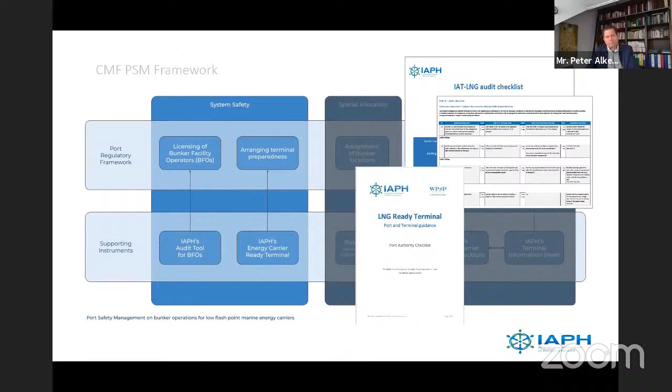Also, on an operational level, we ensure harmonization of operational safety of all the bunker process involved parties. On this level, we provide the bunker checklists, which have already been in use since 2013 for LNG, truck to ship, ship to ship, and station to ship. Terminals are also involved on an operational level, and CMF provides the terminal information sheet, which is part of the bunker checklists. And then we come to spatial allocation.

And this is quite important. Often based on national legislation, a port authority may have to decide at which locations bunker operations in a port area are permitted, taking into account, among other things, the spatial planning of the port, risk analysis for external safety and nautical safety. For CMF, it's rather hard to develop generic support for this safety level.

We are, however, aiming to provide guidance in the port guidance tool we work on. For some ports, it may become the hardest challenge for new fuels: where may the port allow bunker operation, looking at the risks for the surrounding area.

External safety is about risk to the surrounding area when handling hazardous substances, which most of the new fuels actually are. On this slide below, you see the LNG bunkering map for the Port of Amsterdam. It's based on external safety research. Based on quantitative risk analysis, we have assigned bunker locations in the port.

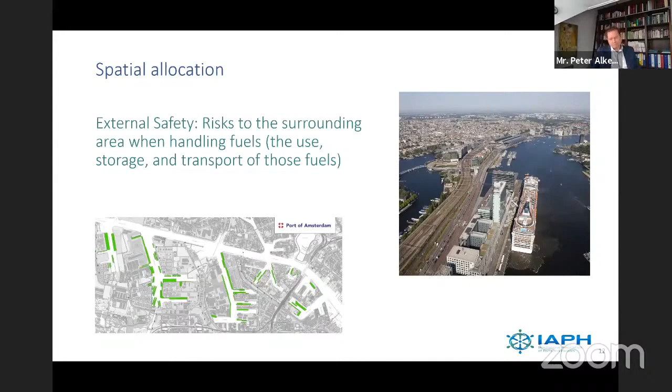On a system level, we're trying to make generic tools of all the tools we have for LNG. The audit tool has to become generic for all fuels, and also the LNG Ready Terminal tool. On an operational level, we've started working on checklists for new fuels, for instance a truck-to-ship cryogenic checklist for both LNG and hydrogen. Also for methanol, we're developing a flammable and/or toxic liquid checklist for truck-to-ship operations.

I'm sure the slides will be shared, so I won't go into detail on all the other tools. That brings me to my last slide.

The shift towards new marine fuels brings challenges for ports. High-level, high-quality safety management is required for the new fuels now under consideration, both on the vessel and port side. Ports are working hard to overcome these challenges, and the IAPH Working Group on Clean Marine Fuels continues to develop instruments that support improving existing bunker safety frameworks in ports. When it comes to the IMO strategy to reduce greenhouse gas emissions, cooperation in the industry is essential. I think it's fair to expect that IMO, as well as IAPH, have a role in stimulating cooperation for the implementation of high-quality bunker safety management.

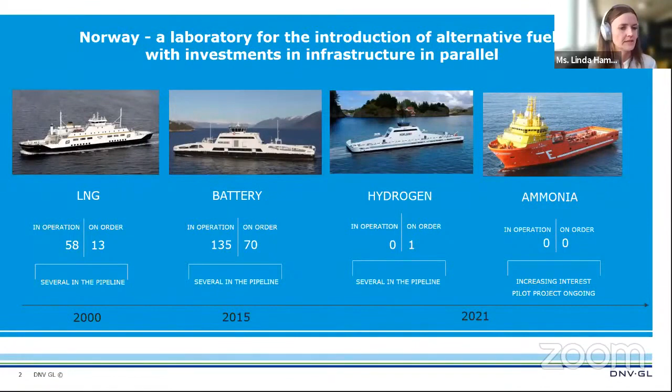In DNV's Maritime Forecast to 2050, we have mapped the key barriers for selected alternative fuels. There is no time to go into the details now, but the report is available online. One key barrier is safety and development of safety regulations. For shipping to succeed in using new fuels, it's a prerequisite that we know how to handle the safety.

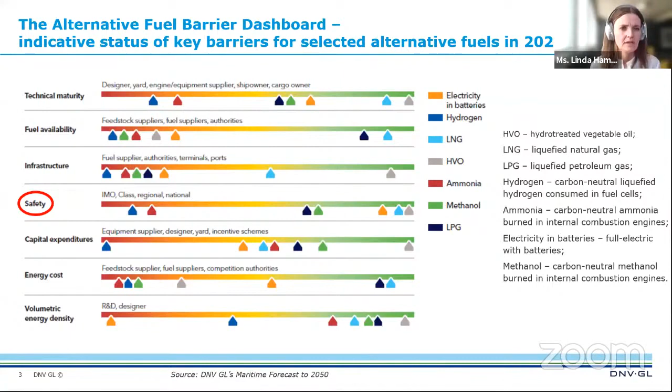So what are the safety challenges? Most non-conventional fuels are gases or low flash point liquids. They have properties posing different safety challenges from those of conventional fuel oils. The main challenges are fire and explosion. Some are toxic, some are stored at cryogenic temperatures, and there is a high energy content in gas tanks. This requires additional safety barriers to maintain the safety level when compared with conventional fuels.

And since the properties are specific for each fuel, there is a need for development of requirements for each fuel type.

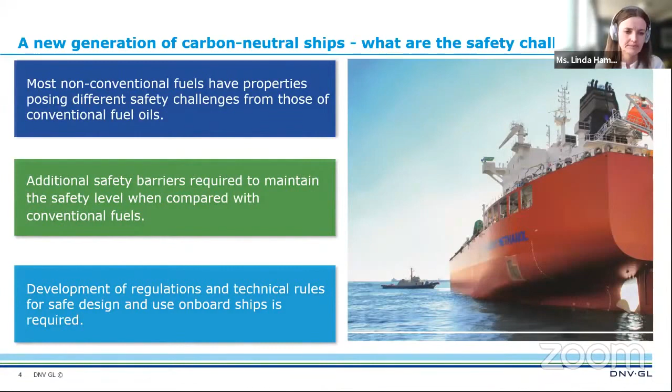It has been a strong focus in Norway to establish requirements for the safe use of alternative fuels, and by that, removing barriers to the uptake of alternative fuels, starting with national regulations and class rules for LNG 20 years ago, followed by class rules for fuel cells, batteries, methanol, and LPG.

On behalf of the Green Shipping Programme, a public-private partnership in Norway, DNV has recently completed development of an ammonia safety handbook with input from the Norwegian Maritime Authorities and other partners in an ammonia pilot project. The intention is to provide practical guidance on safety aspects in developing ammonia fuel ships. The first class rules on ammonia as fuel are planned to be published later this year.

There is also ongoing development work for hydrogen, and DNV is working with industry partners on removing barriers. We have initiated the MariSafe joint development project designed to advance maritime hydrogen-specific competence. This JDP aims to provide preliminary recommendations for the safe and effective introduction of hydrogen as a marine fuel in a safety handbook later this year.

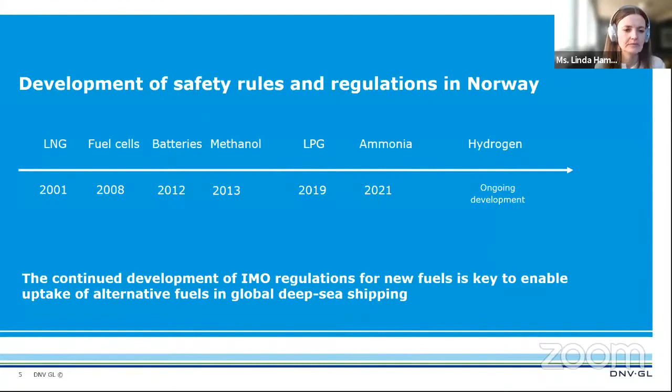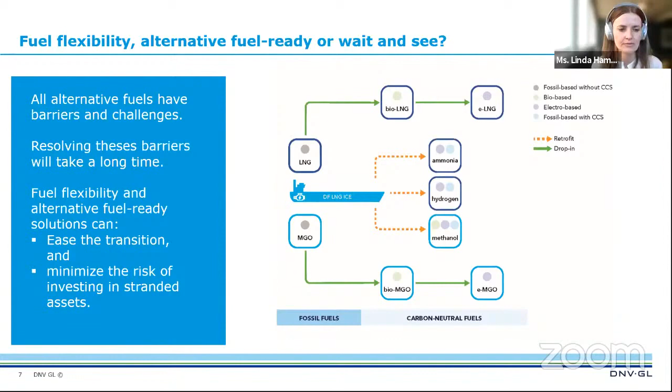In the development of zero-emission solutions for deep-sea shipping, we need pilots. There are, of course, different opportunities in short-sea shipping and deep-sea shipping, and not all technologies are yet applicable in deep-sea shipping. The experience in Norway is that the introduction of alternative fuels and new technologies in short-sea shipping is a good way of maturing technology for use in regional short sea shipping and later global deep sea shipping.

The continued development of IMO regulations for new fuels is key to enable uptake of alternative fuels in global deep sea shipping. Thank you for listening.

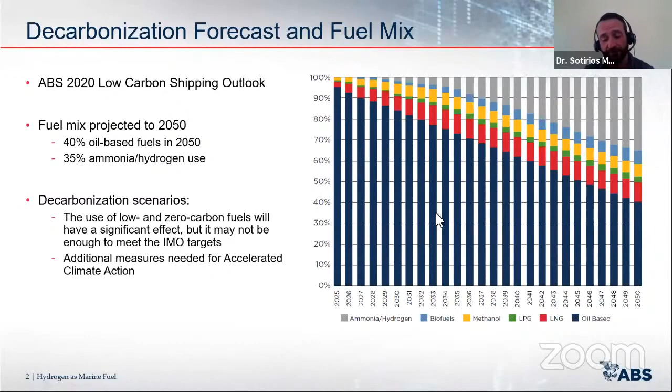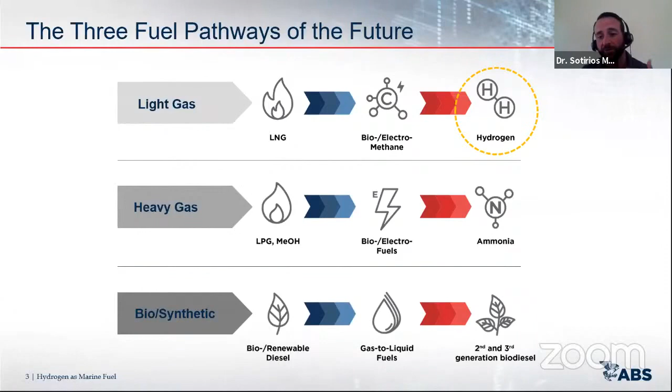That has to do with the fuel containment systems, the fuel gas supply systems, and of course the operational methods and techniques that you can apply to maximize the benefit of using a zero carbon fuel such as hydrogen. So really, hydrogen is at the end of our light gas pathway, and by the end we mean longer term — 2035, 2040, and on all the way to 2050.

Now, a few important, basic things about hydrogen. Based on the International Energy Agency numbers from 2019 global production, we know that about 75% of hydrogen is produced from natural gas, and about 23% is produced from coal. That immediately leads us to believe that the production itself is a carbon intensive process, which does not make hydrogen very, very green.

So we immediately know that in order to promote the green credentials of hydrogen as a fuel, we need to find other ways to produce it, using, for example, renewable energy, and of course using water as the source.

Hydrogen and ammonia are directly linked in the production pathways, because once we have hydrogen formed from whatever source, we can combine it with nitrogen to produce ammonia. So really, the production pathways being linked means they can be produced in the same facilities or in sister facilities, that can be either centrally located or distributed.

The challenge, as you may have heard, with hydrogen comes from its storage and transportation. It's kind of challenging to store it as a gas or a liquid, and I'll tell you about it in the next slide. But recently we've seen the advent of solid or liquid storage techniques, such as using liquid organic hydrogen carriers, for example. I'll tell you more about it in the following slide.

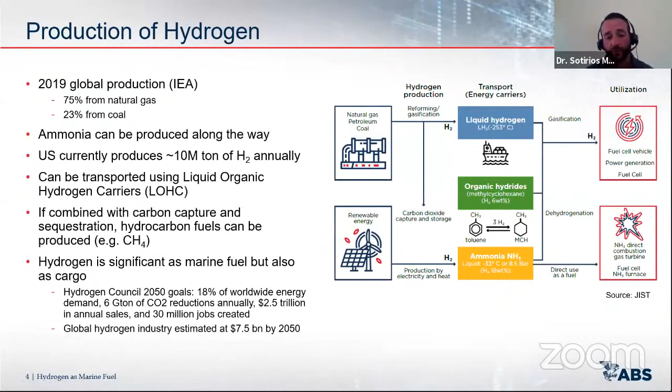That would correspond to about 6 gigatons of CO2 reductions annually, and $2.5 trillion of annual sales, resulting in about 30 million jobs created by that time. And the global hydrogen industry is estimated at $7.5 billion by 2050. So these are pretty significant numbers, and they point to the fact that we can have a significant hydrogen economy on a global scale by 2050.

Now, let's talk specifically about hydrogen storage, which will give you a better understanding of the challenges associated with this zero carbon fuel. So as we previously mentioned, hydrogen can be stored as a gas or a liquid. And of course, there are benefits and challenges to either option. It can be stored as a gas compressed at 350 to 700 bar, or as a liquid, cryogenically stored at minus 253 degrees C at atmospheric pressure. Or the other option would be to store it on or within solids.

And the importance of this really comes from the fact that there are applications that pose stringent requirements in terms of space. An example is automotive. The marine applications, not so much, but still we care about space and the tank volumes on board. But a lot of these solutions are currently in the research and development phase. And recently, in the last couple of weeks, I saw an article about a method of storing hydrogen in a gel type of structure that can be easily decomposed to extract the hydrogen on board, whether we're talking about a marine vessel or a car, for example.

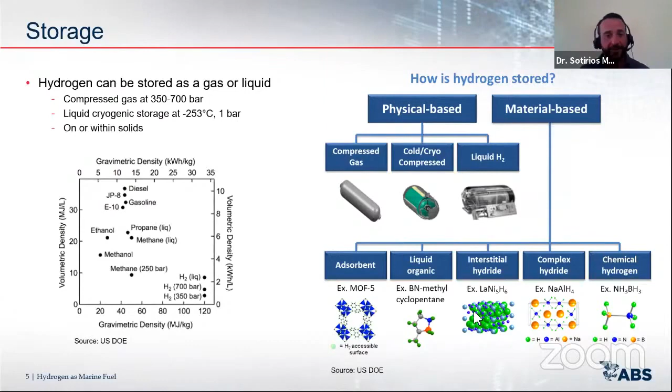But as we mentioned at the beginning of this presentation, this is a pretty carbon intensive production process. So that is one thing we need to really take care of, to make sure that we reduce the carbon intensity from the production as much as possible. With that said, in terms of IMO actions, there is a lot of discussion about accounting of life cycle emissions when we're talking about alternative fuels.

And this is a question, I would say, we get very often from customers. They would ask, if I use a biofuel or something else that has been produced renewably, can we get some benefit from that? And if so, how are these benefits quantified? What's the credit for us? So that's really something that we can point back to the IMO to discuss. So, life cycle emissions accounting.

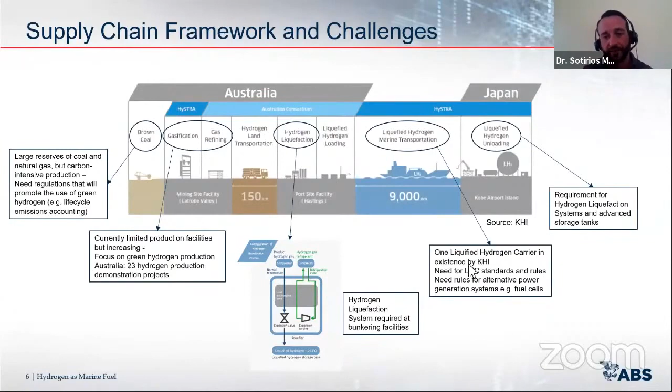Of course, the distribution is still an issue. We've seen examples of trucks carrying the hydrogen, because the properties of the fuel make it very challenging to build a pipeline infrastructure, and that points to more distributed or localized hydrogen production stations rather than central production stations and then pipeline delivery to multiple sites.

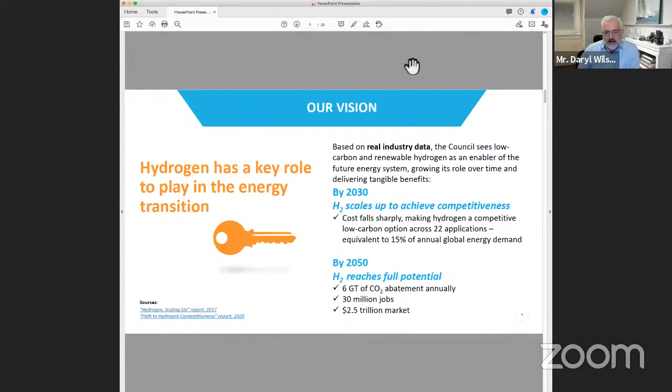And in our reports from the Hydrogen Council, we have shown that there will be a significant scale up in hydrogen use through 2030. And there are 22 applications representing 15% of global energy demand where hydrogen will serve on a competitive basis, and indeed a very large market by 2050.

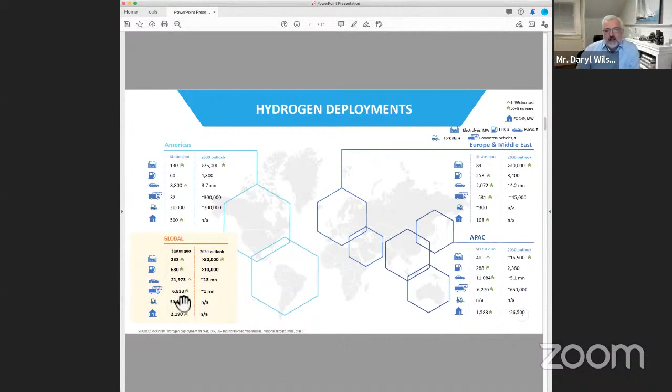Here we summarize some of the applications that are already under development around the various regions in the world. You can see that already we have 680 hydrogen fueling stations globally, more than 20,000 passenger car vehicles, more than 6,000 trucks. So perhaps more activity than you were aware already.

The total value of this investment is substantial. It now amounts to more than 350 billion in announcements. And out of that very large number, 38 billion have already passed investment decisions. So a lot of progress of late in hydrogen.

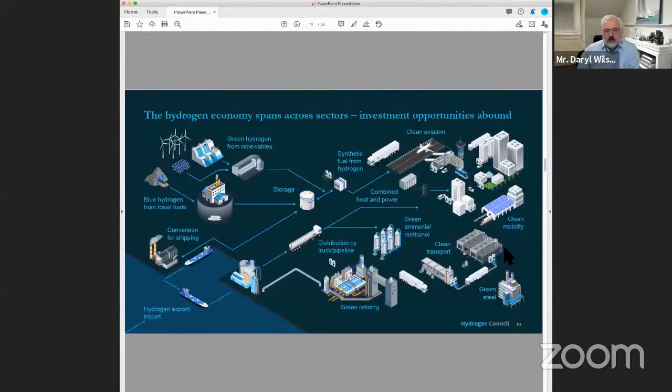One of the compelling aspects about hydrogen is it's able to serve as an energy vector across multiple sectors in society. In fact, we sometimes use the word sector coupling. And so you can see on this slide that hydrogen is involved in shipping. We'll come to that in a moment. In the migration of renewable energy as an energy carrier and a means of storage, integration into industry, in aviation, in transport. So many, many functions can be carried out with hydrogen as an energy vector.

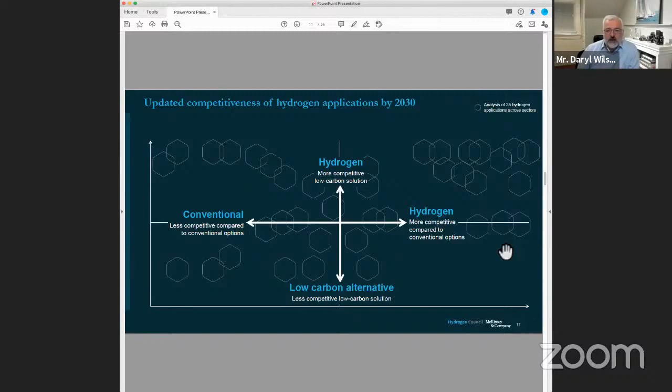To understand these diverse applications, the Hydrogen Council prepared a report, and this again will be updated very shortly coming next week with a spectrum of the applications, considering which ones are most competitive against incumbent solutions, conventional energy pathways, and then which ones where hydrogen is the most competitive green energy pathway. And so the attractive location on this matrix is in the top right-hand side.

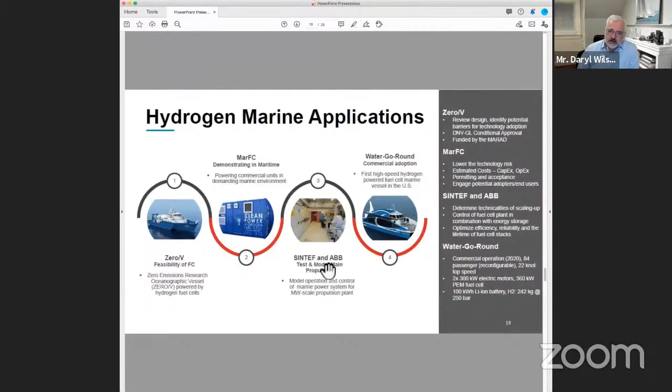The attractiveness here is that the hydrogen system can be fueled more or less on the same time frame as a diesel system. So you're putting a liquid or gaseous fuel on board, and that rapid refueling, yet being an electrified system, is one of the attractive points of hydrogen as a fuel. In Japan, another example with the NYK line working together with Kawasaki Heavy Industries and ENEOS Corporation.

Here, one of the key activities of the Hydrogen Council is to make clear the competitive and cost profile for hydrogen. Cost has been one of the impediments over time, and we have taken the role to start to show the roadmap for cost reduction to realize some of these applications.

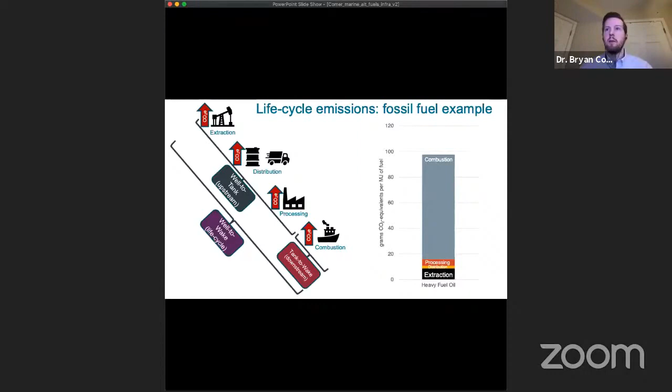Life cycle emissions from fossil fuels, like the example heavy fuel oil on the right, are generally dominated by combustion emissions, which you see in gray. However, upstream emissions, especially those from extraction and processing, can vary considerably.

Now let's consider a biofuel made from a food crop, in this case, soybeans. Instead of extracting crude oil from the ground, soybeans are grown and then converted into what's known as renewable diesel. It's called renewable diesel because the feedstock, the soybeans, is a renewable resource. But just because it's called renewable does not necessarily mean that it's sustainable.

If you look at the graph on the right, you'll notice that the combustion emissions in gray are offset by the carbon the soybeans sequestered while they were growing, shown as negative emissions in green. But there are emissions associated with cultivating, distributing, and processing the soybeans, shown in black, yellow, and red. You'll also notice the brown block at the top, labeled indirect land use change.

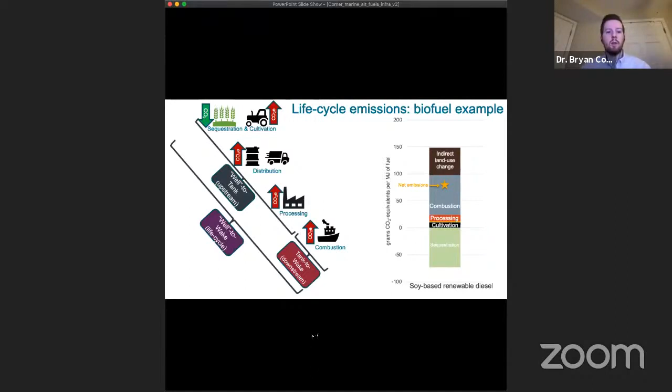Because soybeans are a food crop, the soybeans grown to make biodiesel displace those used for food. To continue to meet demand for soybeans, new land will be cultivated to grow soybeans for food. The emissions associated with indirect land use change can vary significantly depending on the crop and what the newly cultivated land was previously used for.

So as you can see, one must carefully consider the climate credentials of fuels to determine whether or not they are truly sustainable. To help, the ICCT has developed three principles for evaluating the sustainability of alternative marine fuels, and allow me to go over each one in a little more detail.

The first principle is to consider carbon dioxide equivalents, not just carbon dioxide. Why? Because some fuels are zero carbon, but not zero greenhouse gas. This is important to IMO because IMO's initial greenhouse gas strategy aims to reduce greenhouse gases by at least 50% from 2008 levels by 2050, and to phase them out completely as soon as possible this century.

The pitfall IMO must avoid relates to zero carbon marine fuels that nevertheless emit greenhouse gases. For example, burning ammonia emits no carbon dioxide, but it does emit nitrous oxide, N2O, a potent and long-lived greenhouse gas. For now, IMO regulations like the EEDI only regulate carbon dioxide.

Given that IMO's stated goal is to reduce and eliminate greenhouse gases, which are reported as carbon dioxide equivalents and not merely carbon dioxide, the IMO could regulate carbon dioxide equivalents in existing and future regulations, including the EEDI, which regulates the carbon intensity of new ships, and in regulations under development to regulate the carbon intensity of existing ships, including the EEXI and the carbon intensity indicator.

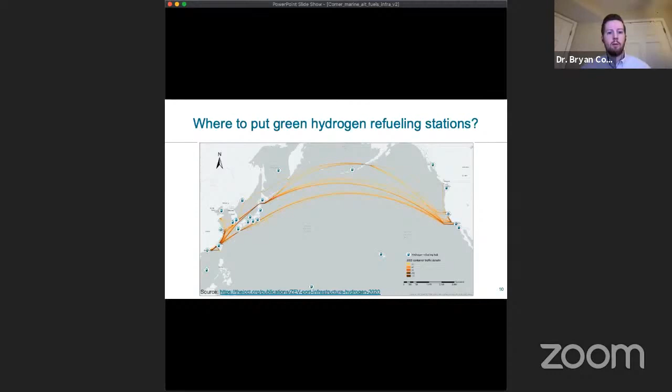The circular fuel icons are places where green hydrogen refueling stations could be placed. To replace all fossil-fueled ships with hydrogen on the Trans-Pacific corridor, ports would need to supply about 750,000 tons of hydrogen each year, especially in Northeast Asia and in California's San Pedro Bay region. This is equivalent to about 1% of the hydrogen used in the industrial sector each year, but the difference is that this hydrogen would need to be made from renewable electricity to be sustainable, whereas, as we heard earlier, nearly all hydrogen used today is made from fossil fuels.

Now that you've seen an example of how sustainable alternative fuels could be used, let's conclude with some ways that IMO could help ensure that policies promote sustainable alternative marine fuels that have bona fide climate credentials based on the 3 principles we outlined earlier. First is replacing carbon dioxide with carbon dioxide equivalents, as proposed in existing regulations. Second is calculating carbon dioxide equivalents based on the 20-year global warming potential of climate pollutants like black carbon and methane, for regulations that are meant to align with the Paris Agreement temperature goals. And the third is regulating well-to-wake carbon dioxide equivalent emissions, not tank-to-wake, in policies that are designed to promote the uptake of sustainable alternative fuels.

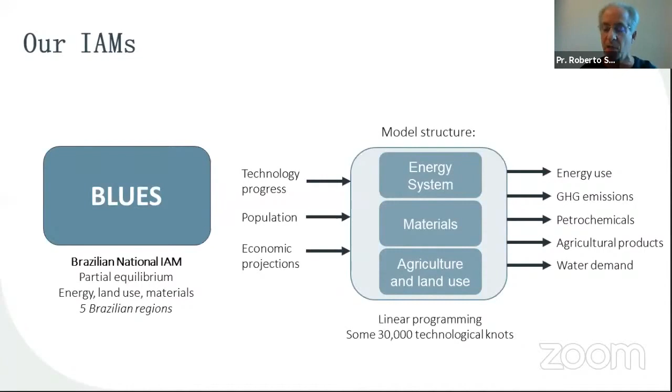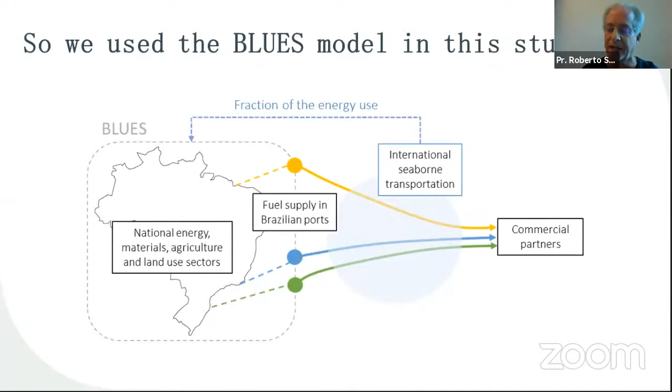This model has roughly some 30,000 technologies represented in it. And basically the output of this model is energy use, greenhouse gas emissions, petrochemicals, agricultural products, and for example, water demand. So what we have done is basically use or adapt this integrated model for Brazil to represent international shipping and represent maritime fuels into that model, to see how the model will react to, for example, meeting the IMO target by 2050. So now let's look at how we have represented these fuels into our models.

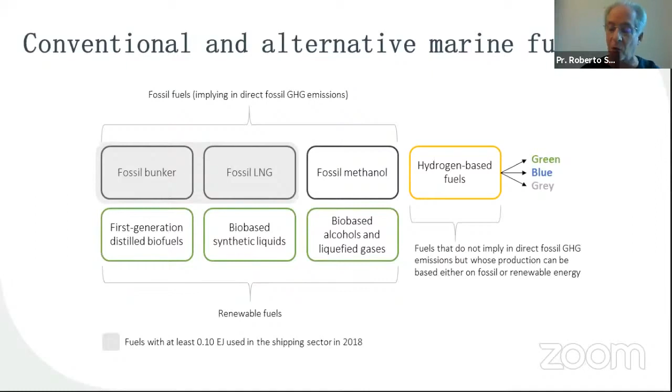We have split these fuels into fossil fuels, implying direct fossil greenhouse gas emissions. So we have looked into fossil bunker, fossil LNG, and fossil methanol. But we also have looked into renewable fuels like first generation distilled biofuels, bio-based synthetic liquids, bio-based alcohols and liquefied gases. And also from the hydrogen side, we have looked into hydrogen-based fuels, and green, blue, and gray hydrogen. This, as I'm going to show you, does make all the difference in the results and analysis I'm going to be performing here.

So this is very briefly how the production routes of these different fuels are represented in our model. In the case of the fossil routes, we're talking about crude oil, producing oil, going through an oil refinery, producing fossil bunker, or you can produce ethene and through oligomerization produce fossil bunker, or natural gas through liquefaction producing liquefied natural gas, or through chemical synthesis producing fossil methanol.

In the case of hydrogen-based, we have looked into hydrogen that could produce ammonia through the Haber-Bosch process, or you can produce hydrogen liquids and then go into hydrogen bunker or electro bunker, depending upon if I use electricity-based hydrogen to do that. It's also important, I'm going to focus on that later, on the byproducts associated with some of these routes. So basically, eventually, you may have a fossil route, a renewable route, or a hydrogen route where the fuel for shipping is a byproduct of other products, and this does make all the difference in the results I'm going to be showing you.

In the case of bio-based fuels, we have looked into ethanol for bioethene production, and then through oligomerization producing biobunker, or lignocellulose biomass through bioethene or biomass to liquids to produce biobunker, or using biomass residues also through BTL or biodigestion to produce biomethanol or biobunker, and also vegetable oil through hydrogenation to produce hydrotreated vegetable oil or direct use as straight vegetable oil.

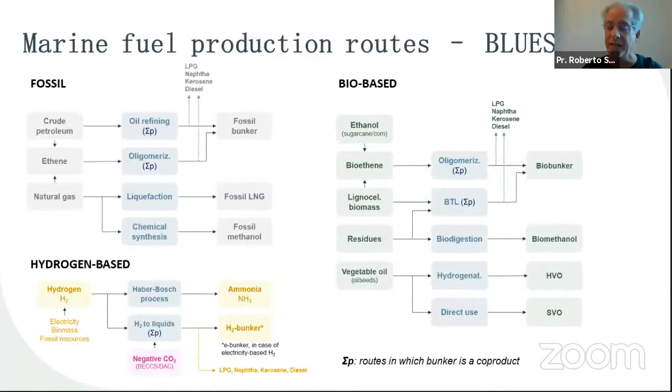So these are all, let's say, fuels that we have put into our integrated model to see the responses to that. So we have run two different groups of scenarios.

In the case of group 1, we have run 4 different scenarios. The first one is a baseline scenario, basically meaning we're not concerned about IMO targets, but simply look into the future of international shipping in terms of fuel. Then we have interpreted the IMO target as being CO2 only, meaning that we would meet the IMO 2050 target in terms of CO2 only, 50% reduction by 2050 as compared to 2008 in CO2 only. And we're not concerned about any national target, but only the IMO target.

Or we have interpreted the IMO target in terms of greenhouse gas emissions. So we are talking about CO2 equivalent in 2050, 50% below 2008 numbers. And also we have added a new scenario, which is the most important one, and hopefully the most interesting one, which is a Brazil below 2C scenario. So basically, we run a scenario for Brazil in a below 2C world to see whether or not the IMO target would fit well into this strategy for Brazil. I think this is the most interesting result I'm going to be showing you later on.

Also, in the case of group 2, we have run 4 different scenarios. One is what we call an IMO drop-in scenario, which basically means we meet the CO2 equivalent target for IMO, but only using drop-in fuels. Or the same way, let's say we meet the IMO target in CO2 equivalent, but only using hydrogen bunker fuels, or only using methanol, or only using ammonia. And basically, we want to see what are the implications in terms of greenhouse gas emissions of these 4 different scenarios or 4 different strategies.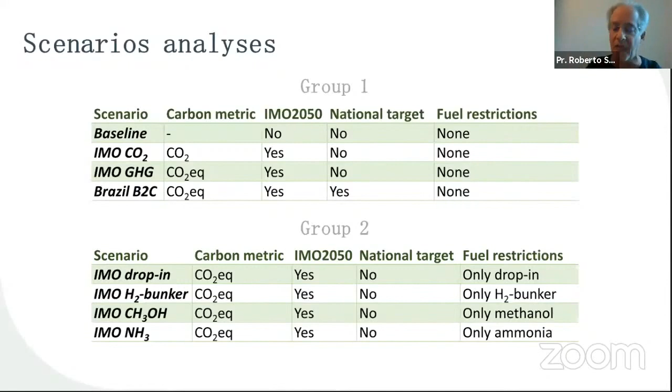In the high demand scenario for group 1, as expected, the baseline, or doing nothing for the IMO target, simply means that by 2050, we're going to be using 100% fossil bunker. If you interpret the IMO target in terms of CO2 only, the least cost solution for 2050 is to use some hydrotreated vegetable oil, some straight vegetable oil, and some LNG.

If you interpret the IMO target in terms of greenhouse gas emissions, because of methane emissions, because of N2O emissions, in that case the solution is different. In that case, we see some fossil bunker, we see some hydrotreated vegetable oil, and then we see some straight vegetable oil.

But when we look into a Brazil below 2 degrees scenario for 2050, we see a completely different result. Basically, if Brazil wants to stay below 2C or in a world below 2C, the least cost solution is basically to have some fossil bunker and then have a lot of synthetic bunker. And I'm going to explain this later. The reason for that is simply because synthetic bunker is a byproduct of other things going on in the Brazilian economy to meet the 2-degree target.

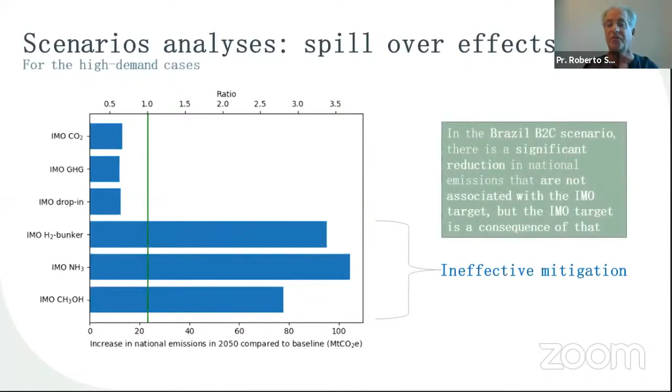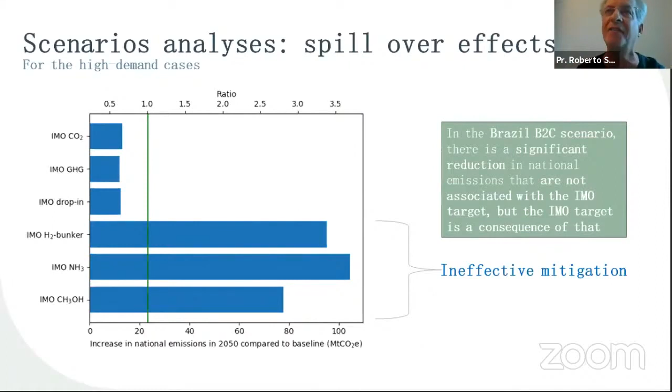So thank you very much. So the message here is exactly that. The real interpretation of the IMO target should be in a broader context of an integrated assessment model, so that we see the target is a byproduct of a country result.

Just to get the big picture, most of the projects that we've included in the mapping have a connection to Europe. About 2/3 of the total of 106 projects we've got in the mapping right now have a connection to Europe. There are several reasons for that. We're based in Europe. We have a lot of member companies based in Europe, so that biases the research. But we also think there is a lot of activity going on in Europe. Norway, the Netherlands, Denmark, and Belgium all have numerous projects in the mapping.

Since the first edition, we've managed to expand the geographical spread so that we include almost twice as many projects in Asia as we had before. We believe and expect there are many more projects we have not yet uncovered, but we also suspect, based on the timing of the projects we have uncovered, that there is an increase in activity happening in Asia as well. So we do see a broadening in the geographical spread of activity in this area.

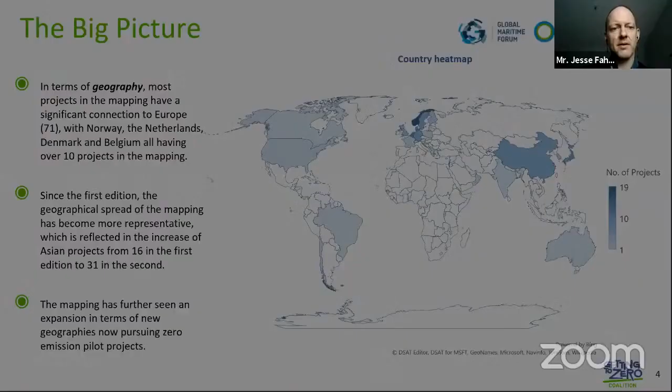Looking at some emerging trends, here we're just comparing between two time periods: projects that started before 2020 and projects that started in 2020. If we look specifically at large ship projects, which is of particular interest for our coalition, we see a notable uptake in hydrogen-based ship technology projects, but particularly an uptick in ammonia projects, 4 of which are large demonstration projects. And we've also seen a couple of new concept studies launched in 2020.

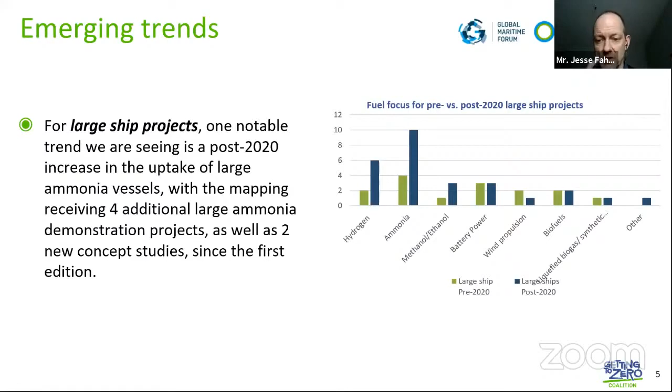For smaller ships, we see a continuing trend towards hydrogen and battery power, and in fact, a lot of combinations of the two. This is perhaps unsurprising, but obviously it's still early, and what you might guess from these two bits of information is you're getting increasing specialization in the demonstration projects.

On the fuel production side, there's been no major shift in trends over time, but we do see focus on Power-to-X fuel production, so hydrogen-based fuels, as really the dominant focus for these studies. That's perhaps not so surprising, given that some of the other options are more mature and maybe don't require quite as much demonstration or piloting.

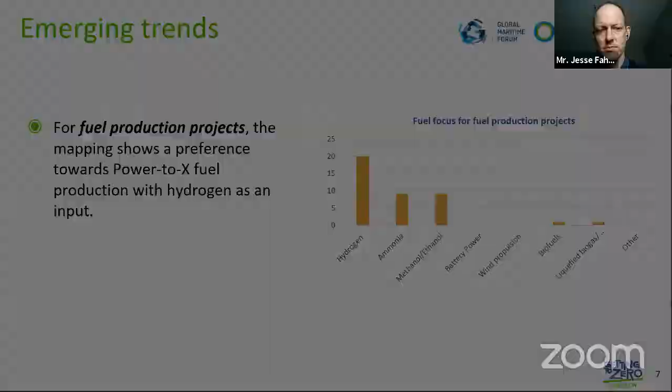In terms of project type and developments in the projects, if we look back at the first edition of the study, about 10% of the projects included in that study have since then, in the last 6 months, announced a new phase or expanded the size or scope of their work, which we think is very positive. Of course, we hope that will end up being a much larger number over time. 6 months isn't that long. Many of these projects have 4 or 5 year timelines.

Of the 106 projects in this mapping, over half received direct public funding. Now, it's important to clarify that there are many kinds of public support that do not appear as direct public funding through easily identified public funding vehicles. So there is probably other kinds of public support for some of these projects. But the majority of public funding for these projects has been originating from Europe. The largest awards of funding go to large-scale fuel production projects. That's also not surprising, given that these are probably the most capital-intensive items in our overview.

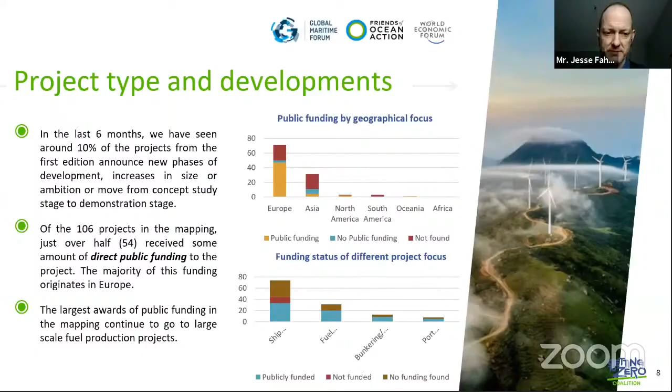So what next? This edition of the mapping is actually not public yet. We're happy to share this presentation with the participants today. That's not a problem. We will be giving a broader launch at the beginning of March. And included in that, we'll make available the full list of projects that we've uncovered with the brief summaries, including the information that you saw in this overview for each project.

Our hope is that by making it publicly available, we can help people who are undertaking projects or considering doing so draw upon learnings from other projects, but also just improve the broader confidence in undertaking these initiatives, both from the industry side and from the policymaker side. We're going to continue to update the mapping ongoing, and we expect to release one report every half year or so. Thank you very much.

I'm happy to take questions, of course, in the question and answer period. And if you would like to contact me offline, particularly if you'd like to see if your projects were included in the study or would like to provide information about a project, we'd be happy to receive that. As we say, the updates are ongoing. So thank you very much.

Thank you very much, Mr. Fahnestock, for a very interesting overview and also for being very precise within your 10-minute limit. And then we proceed to the next presentation, which will be from Mr. Benjamin Maluenda Filippi, Head of the Unit for New Energy Carriers, Division for Fuels and Energy Carriers, Ministry of Energy, Chile, to present the National Green Hydrogen Strategy of Chile. Mr. Maluenda Filippi, the floor is yours.

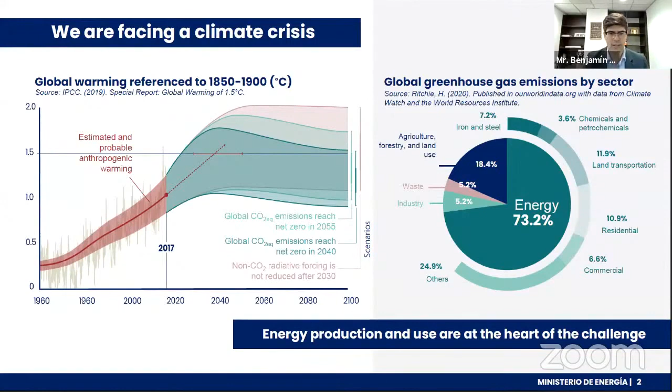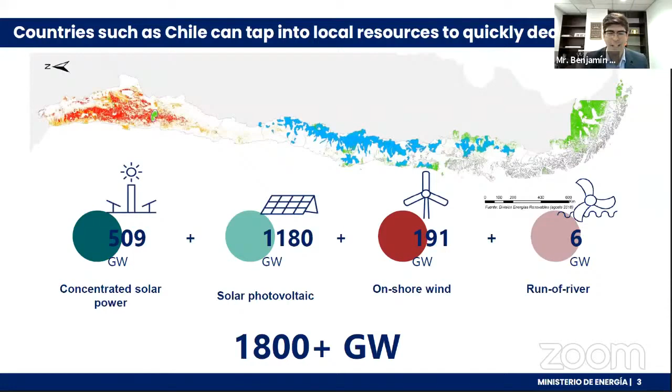So Chile is blessed with a lot of renewable resources, as many of you probably know, as many other countries in the world. The curious thing about Chile is that it's a very remote country with a very small economy relative to other countries. So this potential actually outmatches whatever consumption potential we might have internally. So this provides a huge opportunity for the production and export of clean fuels that are going to be carrying this renewable energy through the world and are going to enable its use in several applications, not only in Chile, but in a port in Europe, in a bus in China, and who knows what else.

So we did a study last year with McKinsey & Company to underpin the national hydrogen strategy we were preparing. And according to their numbers, we have some great projections for cost relating to green hydrogen production. And when you have cheap green hydrogen, you also have cheap green ammonia, cheap green methanol, and cheap synthetic fuels, or at least relatively cheap as to other parts of the world. So by 2030, we will be getting to cost levels that are going to be making our green hydrogen fully competitive against gray hydrogen in some conditions.

And by 2040 or 2050, our green hydrogen could even be competing against natural gas directly, even without any price on carbon. This is a fully economic analysis without any price on emissions. And it's not only a very competitive potential, but it's also a very vast potential. So over 160 million tons of green hydrogen could be produced in Chile with the renewable resources that we already have mapped.

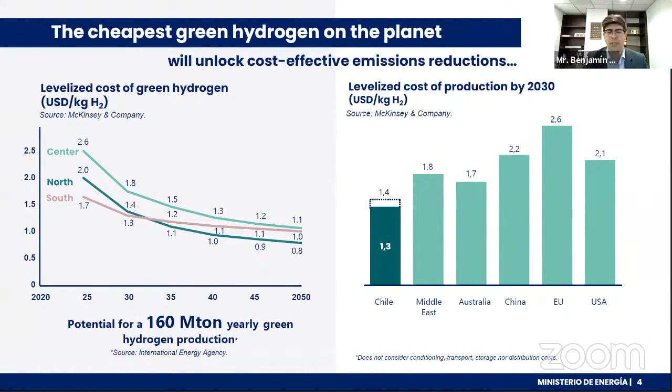So this allows for a wide variety of production of clean fuels, not only hydrogen, but other derivatives as well. And as I mentioned before, we do not have the capacity to consume all that clean energy. So we need to export these clean molecules throughout the world.

These are some example routes that McKinsey analyzed for us, with some estimations on the landed cost of that green hydrogen in, for example, Japan and Korea, or in the US, comparing a little bit to other potential routes that are already under development. And we're looking not only at the export of green hydrogen in liquid form, but also, of course, its derivatives, green ammonia, green methanol, and also other green exports.

And this has a clear implication for the maritime sector from our point of view, because this green ammonia will not only be consumed in industrial hubs, but also will be delivered to bunkering facilities all over the world, especially in the north of Europe and in the Southeastern Asia and Eastern Asia regions, for its use in the future zero emission vessels that we've heard so much about in this symposium.

We already have an MOU underway with Singapore that's going to be actually signed next week to start exploring these international supply routes. We have several others in discussion with private and public entities in the north of Europe. So we're already working on setting up the channels or the routes through which we will be sending these clean fuels to the consumption centers all over the world, especially with a keen eye on maritime uses.

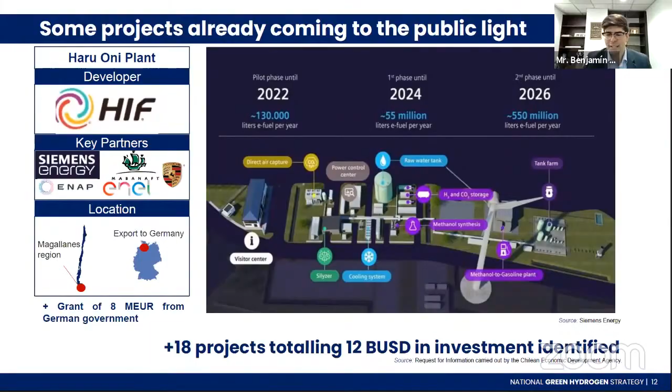So I guess the question for the round of discussion is whether the demand is going to be able to get there technologically, regulatorily speaking, to be able to consume these green fuels. And with that thought, I guess I leave the floor to the next presenter. Thank you.

Thank you very much, Mr. Maluenda Filippi, for a very interesting presentation of what is taking place at the Southern Hemisphere. I have to say, when I saw your opening slide, you reminded me of a personal dream of always going to Chile. So very beautiful.

Now let's continue with our presentations, and I will turn to Dr. Jasmine Lam, from the Maritime Energy and Sustainable Development Center of Excellence, Singapore, to present her views on whether alternative fuels will be ready for shipping to meet its GHG target in 2050. Dr. Lam, you have the floor.

Thank you, Chairman. Hello, everyone. I think you can see my slides. Okay, yes, we can see your slide and now in presentation mode. Thank you very much. Thanks.

Hi, I'm from Nanyang Technological University in Singapore, particularly from the MESD Center. I'm very glad to share with you on this topic: will alternative fuels be ready for shipping to meet its GHG target in 2050?

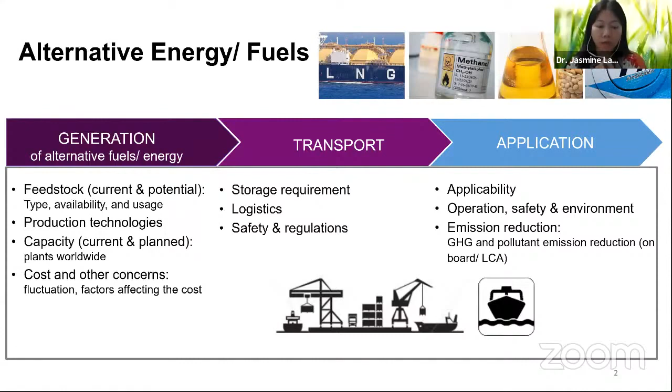Let's say tankers, bulk carriers. The applicability would not be exactly the same. Also, the operation, safety again, and then also the environment, and emission reduction potential, including GHG and pollutant emission reduction on board, and also from the LCA, that means life cycle assessment perspective.

For LNG, basically what we mean is fossil-based, which is a short-term and medium-term solution. Largely speaking, why is this a good candidate? Because of the sufficient supply to support the entire shipping industry. So that's why our perspective is not just about a few companies, but the global shipping industry. However, it's unable to meet on its own the 2050 GHG target.

So that's why the next candidate is biodiesel, the first generation and next generation, which is under the short to medium term. The main limitation is because of the land use, limitation in land use because there is competition with other production as well, but it can be used as a drop-in fuel with diesel.

And also the next one is methanol, basically fossil-based and also biomass-based. It can be used as a clean fuel on board for GHG emission reduction.

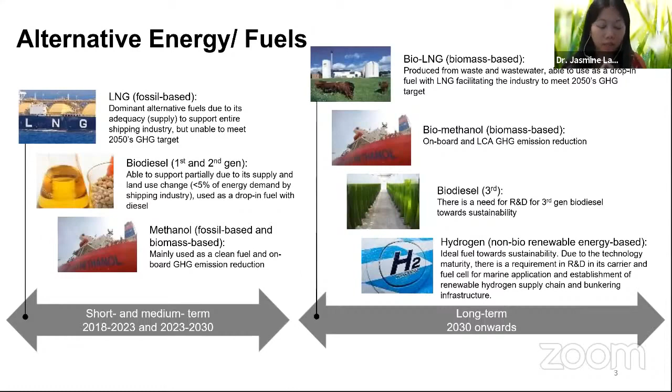So examples are like methane. And the next one is hydrogen. We hear a lot about hydrogen these days. These include non-bio renewable energy-based hydrogen solutions, including ammonia as a carrier, and then also fuel cell and related technologies and solutions. However, this group of alternative fuel also requires R&D mainly for the renewable hydrogen supply chain, and then also the bunkering infrastructure, etc., in addition to the technology itself.

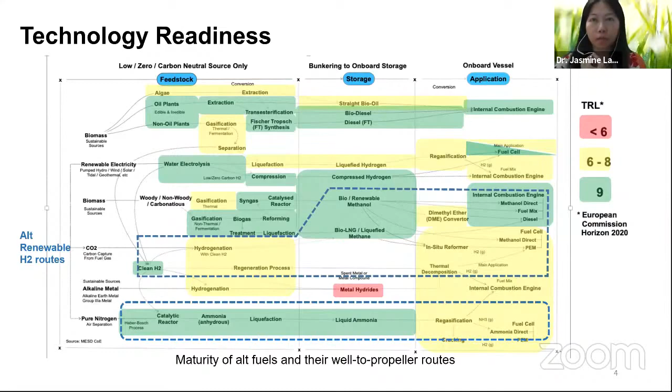And there are other routes as well on alternative renewable H2 routes. So these are the options we consider, for example, from carbon capture, and then also even from pure nitrogen, producing ammonia, fuel cell, and these different options. So at the moment there are some things that should be done in order to make the technology or the alternative fuel ready for the IMO targets.

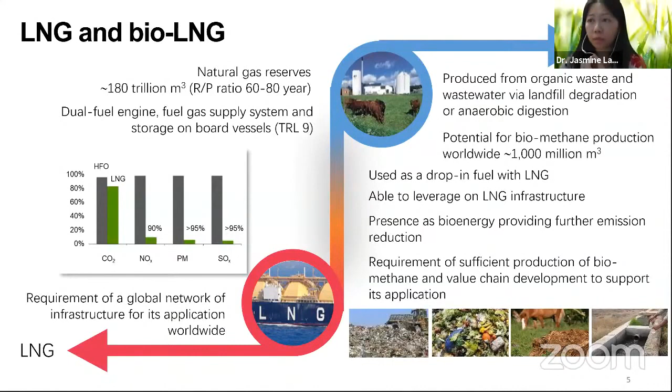And also, I would like to highlight one point which is also interesting: there is a potential for very massive biomethane production worldwide as well. So these are the key facts based on the research.

So here, almost towards the end of my presentation - if you don't know, Singapore is actually the largest bunkering port in the world. We are a major transshipment hub, and we are also the largest bunkering hub in the world. That's why alternative fuel and related matters are very crucial for Singapore. So here I would like to share some efforts to pave the way for low carbon options in Singapore, including LNG. Singapore has started quite long ago already.

We have the Singapore LNG terminal, which was started in 2013 and is the first open access multi-user LNG terminal in Asia. There are many R&D projects ongoing in low carbon fuels, alternative fuels, and cleaner fuel options, including living labs for newer technologies, onboard emission measurements, sea trials, etc.

This is a new point I'd like to bring out: digitalization. It sounds like the forum, we are talking about alternative fuels, so what's the relationship between digitalization, which is also a key hot topic nowadays? The key point is that digitalization actually helps to improve integrated services and efficiency, and in a way, it can reduce emissions.

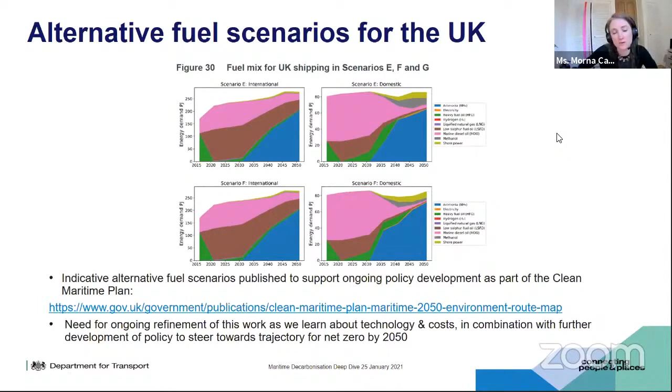In terms of how we are progressing in order to try and support the commercialisation of these fuels, we just last year announced the launch of a £20 million Clean Maritime Demonstration Competition, which we will be seeking to open for applications shortly over the coming months. This is a grant funding competition designed to encourage the commercialisation of mid-TRL clean maritime technologies and try to encourage applications from across all of the UK.

It's part of a wider government programme for a green industrial revolution, which of course will be very important for a green economic recovery from COVID-19. The intention through this competition is to support feasibility studies and real-world demonstrations. And importantly, for this symposium, it will be open to projects from a range of different fuel types.

The final word I wanted to say before I pass to my colleagues at the MCA was that we are also running a number of initiatives targeted at COP26, which do have a bearing on future fuels for the sector. Firstly, our Operation Zero initiative, which seeks to bring together North Sea offshore wind developers and secure commitment to decarbonise their operations and maintenance activities.